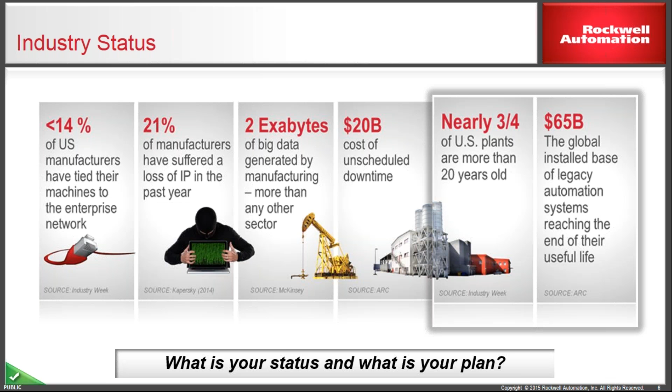But the last two are really highlighted there. I have a hard time believing that's even right - I would think it's more than three-fourths, but basically most of the industrial plants are older than 20 years old, and there's a $65 billion installed base of legacy equipment. And this doesn't just apply to Rockwell or Allen Bradley. It's going to be all the manufacturers out there.

So what are the - again, this is kind of fairly obvious, I would think, to anybody who's gotten older legacy stuff installed in their facility - but what are your risks, right? Your risks are just parts availability, and the fact that who knows how to program a PLC5 anymore, right?

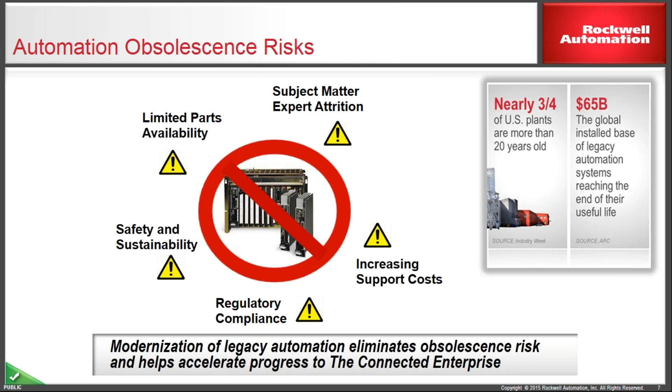So it's just harder and harder to manufacture the older equipment. Again, like I was saying, it's not just PLC5. PLC5 is top of mind today because we're at that end of life of it. But PLC5, of course, 1771 I/O, PanelView standards, a lot of drives, motors - this is just a Rockwell Allen Bradley centric slide. But then you look at the other manufacturers out there, and they're in the same boat as Rockwell, right? It's just harder and harder to maintain and manufacture the older industrial control equipment that's out there.

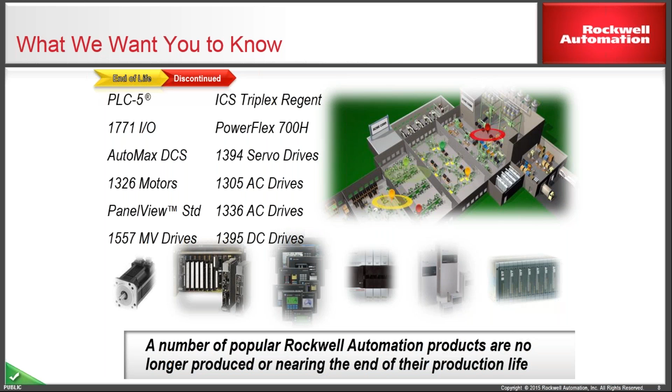So this chart is several years old, but just shows you that this is nothing new. Hopefully the fact that the PLC5 is end of life is not a surprise to anybody listening. This has been told now for several years, but it was a phased end-of-life approach, and certain catalog numbers were phased out earlier, around the 2012, 2013 timeframe, and then finally here to the end of June 2017.

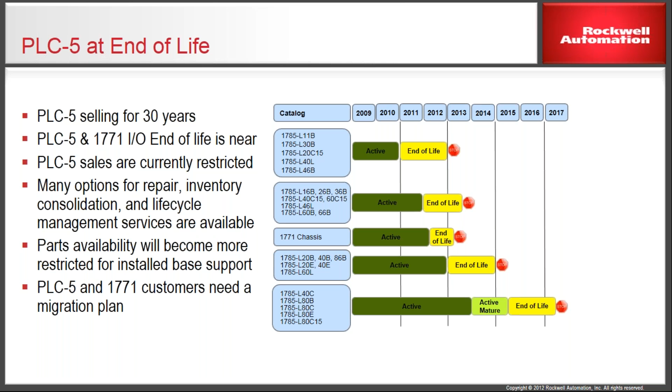And the real reason why this date is the RoHS compliance - so RoHS compliance, or the lead-free soldering manufacturing initiatives, I believe, are July 1st, 2017. So June 30th is that end-of-life date for PLC5. As a manufacturer, you have to weigh - we have a 30-year-old product, do we go back and re-engineer a 30-year-old product, or do we just say we have something newer and better out there, and let's put our R&D and investment in the newer platform? So it's a tough call, but that's kind of what led them to that decision.

So just to give a little background on the end of life of the PLC5, some highlights. It was first released in 1986, which is pretty amazing. The PLC itself has been around since 1968, 1969. So the PLC is turning close to 50 years old, and of those 50 years, the PLC5 has been around for 30. That's a pretty amazing stat.

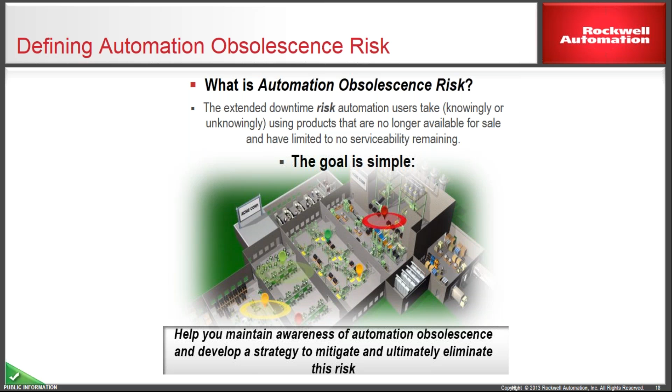One of the cool things Rockwell does is, to my knowledge, they're the only one in our industry that makes this public knowledge, the lifecycle status of their products. They divide it into four categories. Active is the brand new product in that category, you can think of it as the iPhone 7. Active mature is still a new product, still serviceable, still available, it's just that a newer family exists in that product category, think of it as the iPhone 6.

End of life is when Rockwell determines a specific date in the future where they're going to stop manufacturing these parts as new. And then discontinued is once it reaches that date, the product is discontinued. You can't buy it brand new, and the repair exchange services may still be available, but not all of them will be, not for all products.

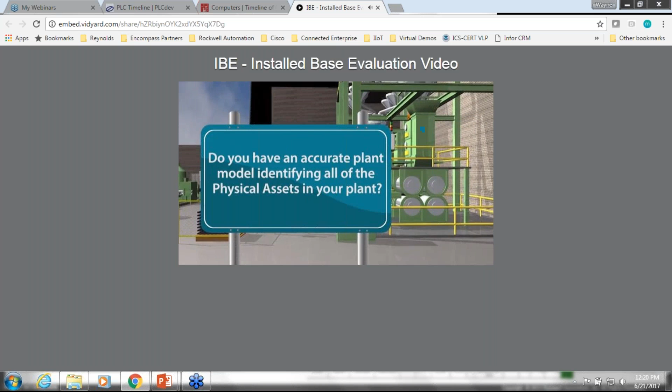Do you have an accurate plant model that identifies your physical assets? Do you know your obsolescence risk? What if a line goes down? Do you have the parts? Do you need to get it back online quickly?

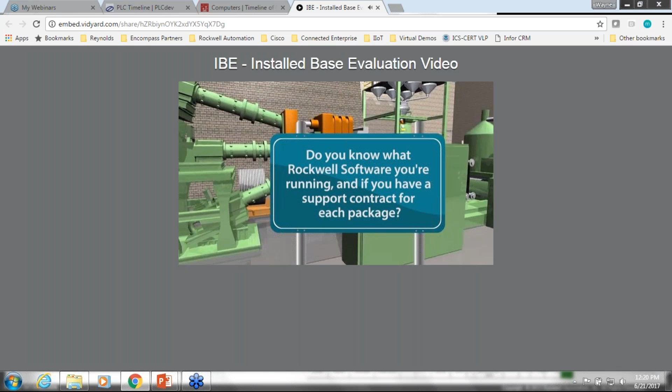Do you know what Rockwell software is running on your computers and whether you have support for these software packages? If you answered no to any of these questions, you need a Rockwell Automation Installed Base Evaluation.

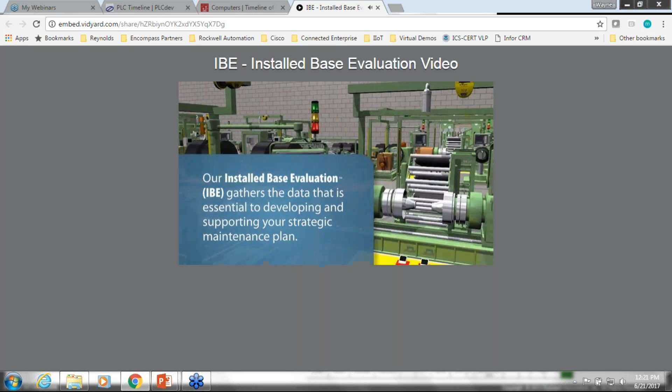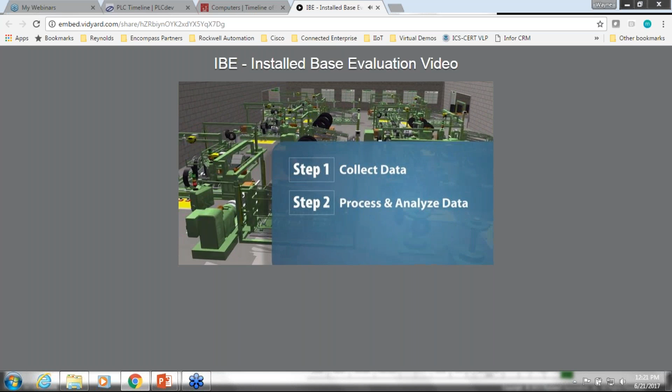An Installed Base Evaluation, or IBE, helps you develop and support an effective strategic maintenance plan by providing you with actionable intelligence. There are 3 steps to an IBE: collecting production-specific data on site, processing and analyzing that data, then delivering detailed reports and recommendations that can help you optimize your installed base and inventory levels.

Here's what an IBE might look like for a typical tire manufacturing plant. During data collection, a Rockwell Automation field service engineer uses a custom-built data collection application to gather detailed plant asset information. The engineer creates a hierarchy specific to that facility by mapping assets to production priorities and using terminology and plant descriptions that are important to you.

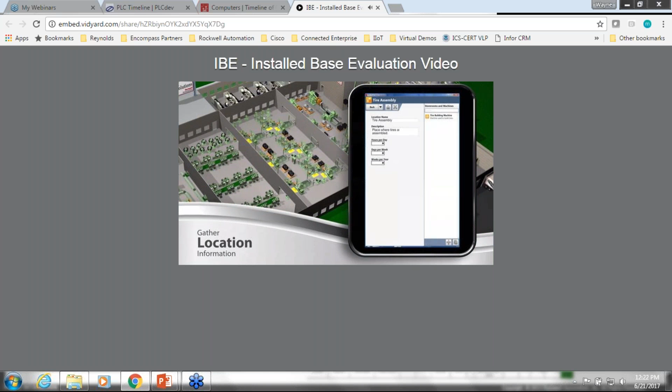Building by building, zone by zone, we go through every aspect of your production processes to capture relevant installed base and spare part data, including environmental conditions, the number of operating hours per process, and part catalog numbers.

Rockwell Automation has invested in the tools and software needed to collect and analyze this kind of data efficiently. We use these tools to collect data on every asset so you and your staff can focus on running your plant. Our IBE analysts compare the collected data to our master database, which contains information and attributes for more than 3 million Rockwell Automation and third-party products.

Using specially designed algorithms, mean time between failure rates, and variable operating hours by production process, we calculate recommended inventory investment levels and generate a series of reports that can be sorted according to highest risk. Finally, a Rockwell Automation IBE specialist will meet with you to present our recommendations and share the interactive reporting tools.

Let's look at 3 examples. The inventory analysis report gives an overview of what's installed and what's in the storeroom. This customer's total inventory has been valued at just over $435,000. 71% of that is their installed base, and 29% is in their storeroom.

A closer look at the storeroom inventory tells us that they have 32% classified as active spares, which directly support the installed base; 40% classified as excessive active spares, which is more than what they need based on our findings; and 28% classified as inactive spares, which were found in the storeroom but not in the installed base.

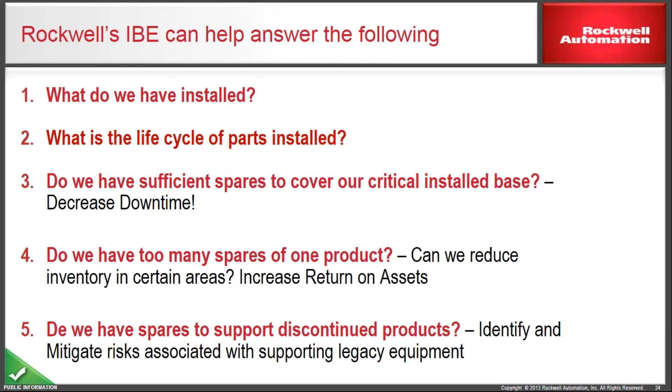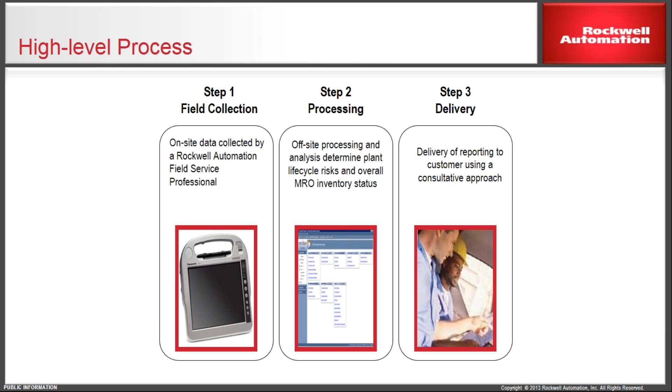So this, real quick, is field collecting, processing, and delivery. The deliverable is all the Excel sheets where you can search and find all the data we've collected, and then we'll give you an executive summary. We'll come and do a presentation for you, your management team, whoever.

The first thing we're going to do, even before we go on site, is develop a hierarchy, all the way down to the panel level and then the product within the panel level. That way, when you're searching through all that data in Excel and picking and choosing where you want to see where your risk is at, we know exactly what part, what location, exactly where it's at in your plant.

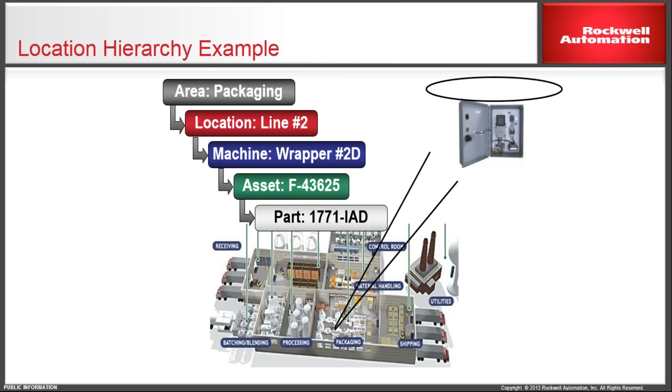So now we're going to look at a couple slides from an example executive summary, and we'll go through that just so you get an idea of what you'll be presented with, what you can use.

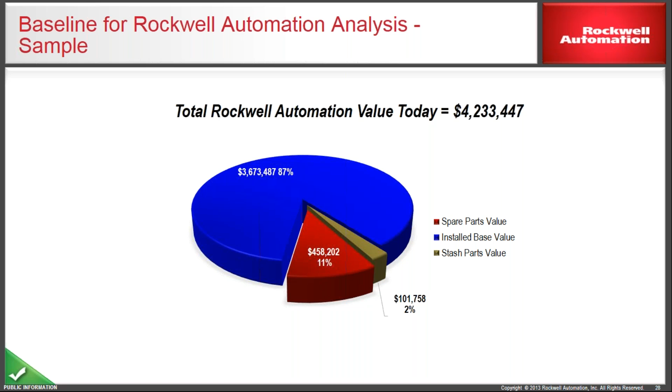So the first thing, we're also going to give you the Rockwell Automation value of your assets today. That's going to be the value you have in your active installed base, your spare parts value, and your stash parts.

Then we're going to go through your status of spares, and we'll give you not only a monetary value for it, but we'll let you know if it's active. Active is what we found in the field. Now this is just the spares in your inventory. We also found in your inventory, and according to Rockwell's mean time between failure data, we feel that you have the right amount of spares to cover what you have in the field.

Excess active is, obviously, we found in the field and in the storeroom, but according to Rockwell's mean time between failure data, you have too many spares in that category, that product. And then inactive is product we found in your storeroom, but we didn't find it anywhere in your facility.

That might mean we missed a panel - there's big facilities with panels hidden in all kinds of places - or it could mean it's just old projects, old parts that you've never got around to get rid of. And then we'll give you an estimated excess carrying cost - what is that costing you to hold all that material that you don't need in your inventory?

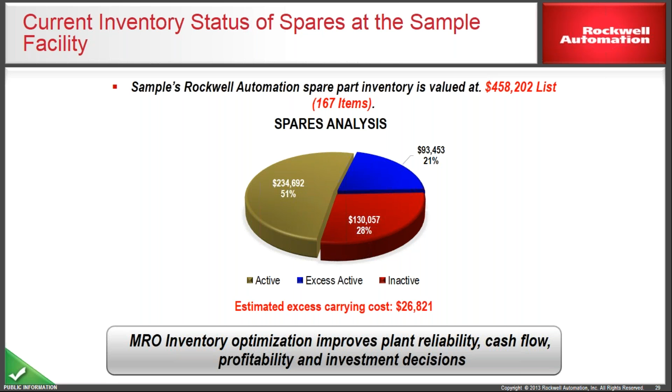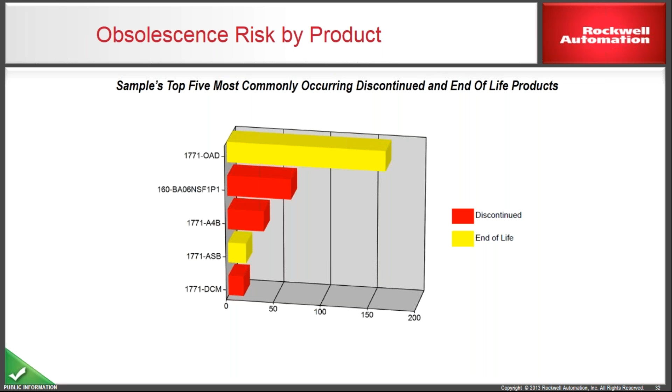And then, real quick, since we're already going through your panel, we're going to give you an overall condition of your panel - the environment, ventilation, ground, and wiring. Is it rusted out? Is there water getting into it? Some food and beverage may have syrup, whatever it is. Is there a rat's nest? The engineers doing the assessment have their criteria: good, fair, or poor. So we'll give you that info.

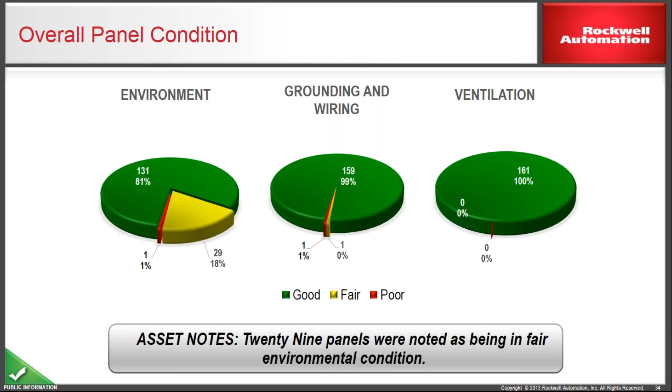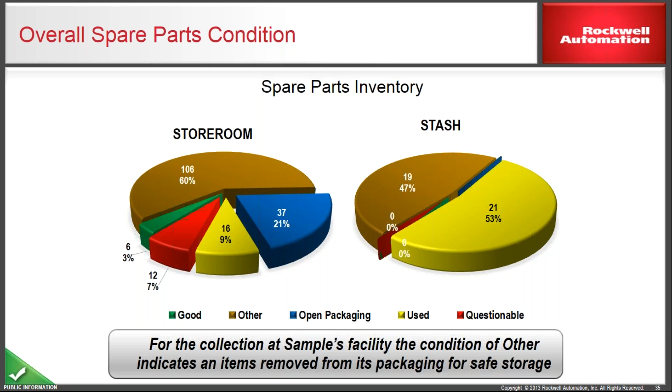Another thing we'll give you is a spare parts inventory. So what is the condition of your spare parts? Are they sealed in a box where you know they're good, or are they in a box but the seal's been broken? Do they look used or questionable in any sort? We'll give you that data as well, and I'll cover a service we can provide to help you out with your suspect inventory.

Okay, now we're going to jump. Any questions on that before we move on? So, remanufacturing and repair.

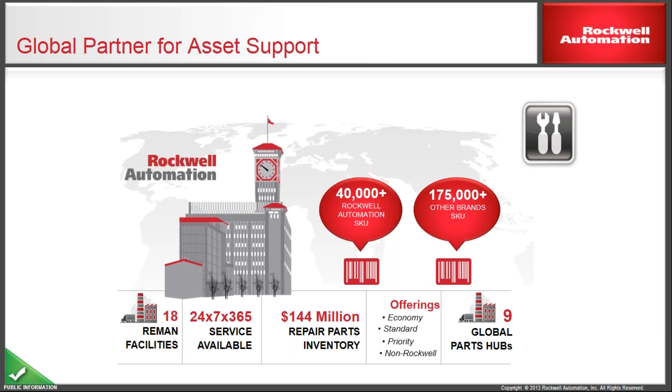Rockwell can remanufacture Rockwell assets as well as repair third-party stuff. They've got 144 million in repair parts inventory, 9 global hubs. We've got 3 standard offerings, which we'll get into in a second. They're all ISO certified facilities, with a big group of people behind this remanufacturing and repair.

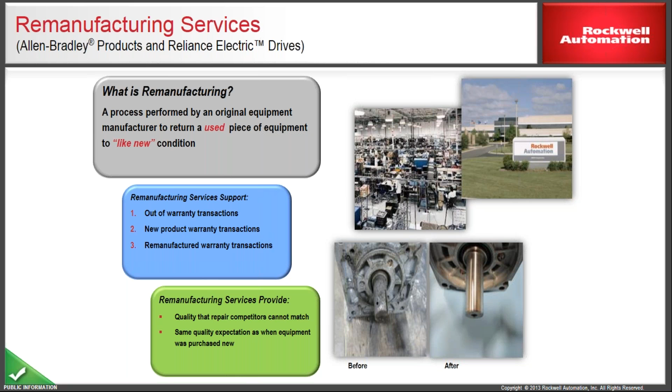So what is remanufacturing? This is the OEM. Rockwell is going to return a used piece of equipment into a like-new condition. What we do at the reman facilities is out of warranty transactions, which are all the billable stuff. The new product warranty transactions we'll fix there, and then you get a warranty with anything we remanufacture, we'll take care of that there. A lot of the stuff we do, especially to the Rockwell parts, we're the only ones who can do it.

And what does like-new mean to Rockwell? We're going to restore it to a functional state. We expect that part to function and work just like it did brand new. Firmware revisions - that's something Rockwell can only do; every time you send something in for remanufacture, we're going to check it, see if the firmware needs the latest revisions. Engineering updates, verification of all OEM specified components - that's all Rockwell stuff.

Functional testing completed. We're going to make sure that everything we send back to you has been functionally tested to make sure that we know it works before you get it back.

And then the other thing is serial number. The first thing we do when we get that part in the repair hub is log the serial number so we can keep track of the warranty, whether it's a new product or remanufactured warranty, whether you got an extended warranty, whatever you did, we'll keep track of that for you. And then it's a comprehensive warranty - so if you send in a drive and only needed one little component repaired, when we send that drive back to you, the entire drive is going to be covered under the warranty, not just that component we fixed.

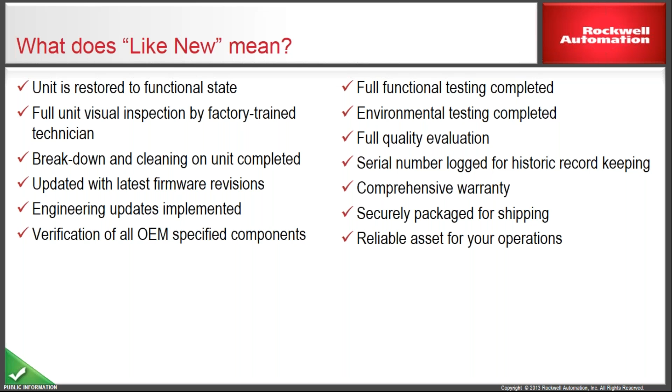So for the sake of time, I had another video I was going to show, but basically it's a proprietary remanufacturing process - all the firmware enhancements, the engineering updates. It'll show we're going to receive it, that's when we do the login of the serial numbers. We're going to do all their enhancements and revisions - that'll be the engineering update, component verification, replacement. We're going to do the functional testing, make sure that product actually works before it ships out. Environmental testing, final quality, and then we'll secure ship it.

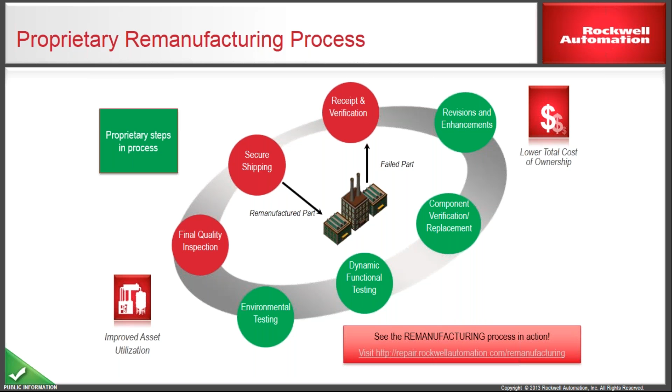I guess we're not going to show the video just for sake of time. We'll put it online after, and all this is on Rockwell's website - everything I'm showing y'all today.

So the 3 service levels are going to be economy, standard, and priority. All three levels go through the same exact process - the only difference is going to be the delivery date and the warranty. Economy is the cheapest, a 4-week turnaround, you get a 12-month warranty. Standard is roughly a 2-week turnaround, and you get an 18-month warranty. Priority is your priority exchange - we're going to ship it to you next day air, and you get a 2-year warranty on that.

On the priority exchange, once you get the new product, we're going to ship it to you with a shipping label to send your old product back to us so we can remanufacture that and put it back in our hub. So that part of the process has to take place as well. Some of these warranties are better than the new product warranty right there, so that's some value added.

Once a product becomes obsolete and isn't readily available to repair, we need to look at reserved repair. Rockwell gives you access to the repair, you give us a list of your obsolete parts that are critical, and we go out and secure the components needed to have the in-house capability to repair those parts for you. The actual repair is a separate transaction, but we're securing access to those legacy items that are hard to repair and hard to find parts for. This service can keep you running if you need to keep older equipment running for another couple of years or whatever your strategy is.

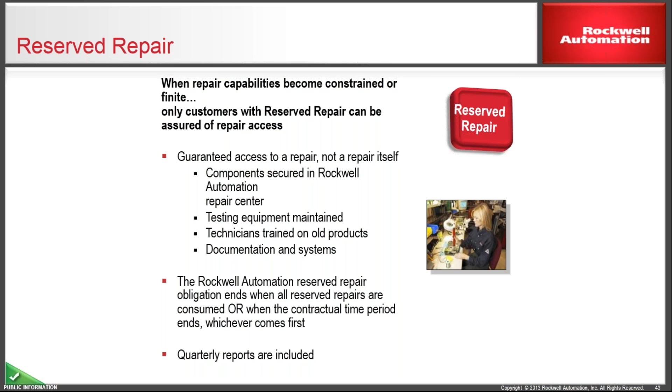Here's another service we can help you with: inventory assurance. It's for all your suspect inventory that's been laying around, where you don't know where it came from, packages are open, it looks used. You can send 5 units to us, not necessarily the same unit, and we'll run it through a recertification process, basically the end process of our reman facility. If it passes all the tests, we'll put it back in a box, seal it, and give it back to you with a 1-year warranty. If it fails testing, we'll put it through the remanufacturing process, billable at the remanufactured price. This is a cost-effective way of recertifying your suspect inventory so you know what you have is good.

Any questions on anything I've covered so far? Good.

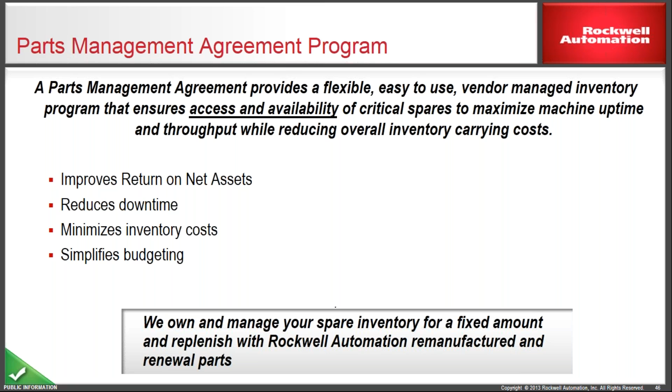Now we're going to get into the PMA, Parts Management Agreement. This is Rockwell-owned inventory on site—flexible, easy to use inventory that we manage, giving you access to your critical spares while reducing your carrying costs. This service will reduce your inventory costs. We own and manage your spare inventory for a fixed amount, replenished with Rockwell automation remanufactured and renewal parts. This is for your critical spares, and we'll do an in-service warranty, which I'll get into on the next slide. You can also do an extended warranty option, and some customers choose to go ahead with that as well.

Let's say, for easy math, we have one part with a $100 list price—Rockwell's online price. But we know you actually don't pay $100, you probably pay close to $75. Carrying costs today, for lean operations, are around 10%, and can go all the way up to 28% or higher. If you Google it, the national average is around 20% for actual carrying cost, but for our discussion we'll keep it easy at 10%, assuming you're lean. Carrying cost is defined as all your taxes, insurance, storage—whatever cost you incur to keep your inventory. That's carrying cost, 10% each year.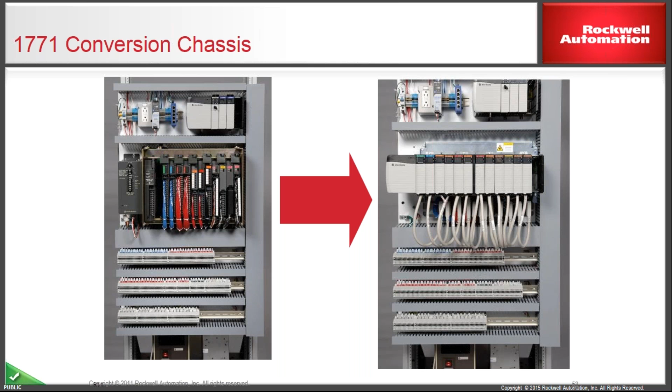And really it's designed for an I/O rack conversion. So if you had a CPU rack that's just bringing in remote I/O data, with no local I/O in that chassis, then the conversion chassis doesn't really buy you a whole lot of value. But if you have an I/O rack with lots of I/O wiring in place, that's where the conversion chassis really comes in handy.

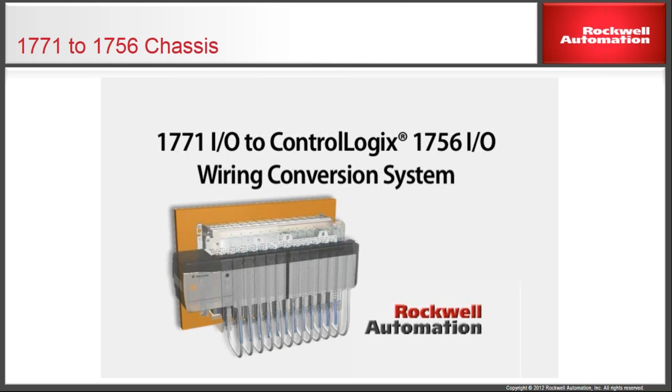So this is a very quick little video. The conversion modules - it shows it much better than I can explain it - allow for the 1771 I/O field wiring to connect to the 1756 I/O. It creates an easier method.

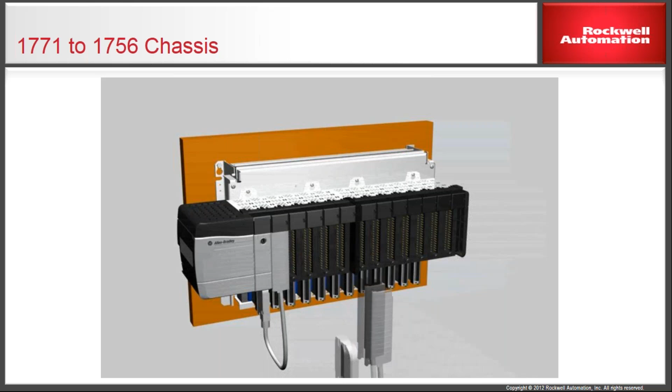So that was, like I said, the video does a nice job of showing it. So big advantage there is time savings, right? So we find ourselves in that situation with a lot of customers when we talk about the conversion chassis.

They might have a very limited downtime situation. Conversion chassis definitely helps. There are times when a customer is like, you know what, if we're going to go through the process of ripping out all that, we want to clean up the wiring. So a lot of times with the conversion chassis, they may not want to go that route.

So do you have one-for-one for each of the cards, or do you sometimes have to wire directly? No, it's one for one. There are situations where one card might turn into two ControlLogix cards, and sometimes two 1771 cards might turn into one ControlLogix card. So there are situations like that.

So the other point here too is, again, we're talking about downtime situations and how much do you really want to disrupt operations, and that's when we get into phased migration. There's really a lot of ways to do this, and what we show on the slides here is just one way, and everybody's got different circumstances, but there's a lot of flexibility in migrating to the new stuff, and it all really boils down to getting onto the Ethernet IP backbone for all your I/O.

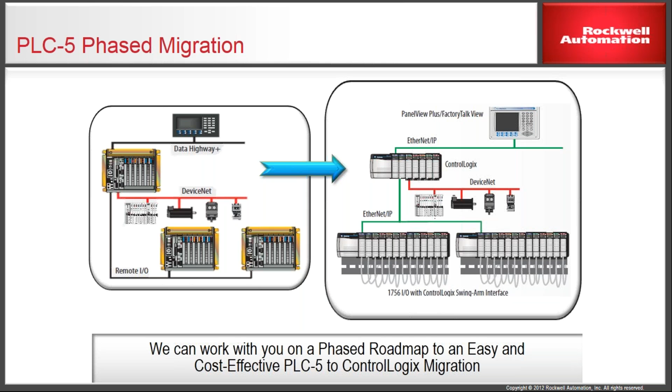But with the ControlLogix family, you can still bridge to your older legacy networks. You can replace a controller first, keep the bridge to your legacy networks, and then over time switch your I/O racks over to Ethernet IP, perhaps in little windows of opportunity versus one long outage.

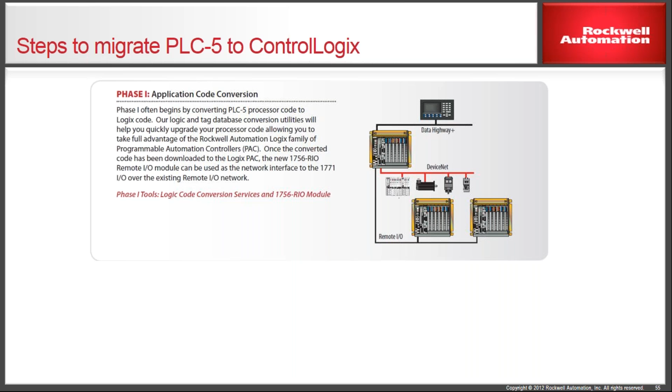So this slide just kind of builds that up a little bit, right? So phase one, of course, is the code conversion. This slide talks about conversion services, but there is a software conversion tool available from Rockwell's website. You can download it, and then you can take your code and convert it. There are steps to that, of course, but you can convert your code.

Like we said a minute ago, the next step would be to replace the PLC 5 controller. So in this case, we took the controller out, put the ControlLogix in its place. We still remained on our legacy network. Again, there's a lot of advantage to that, right? Because we know when you get to the I/O side of things, that's when the can of worms gets opened. So if you want to keep that network in place - and we know it's easy for us to say go to Ethernet, but you just can't go pull Cat5 cable easily throughout the facility. So there's a lot of reasons why staying on the legacy network might make sense for a short-term period.

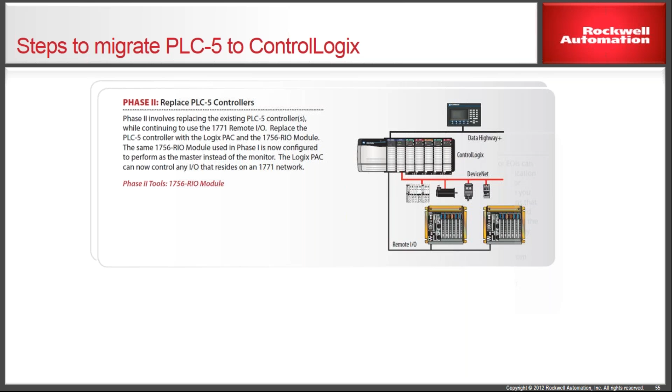Next step may be on the HMI side, right? So it's probably a lot easier to convert your HMI side to Ethernet, and again, leaving your I/O perhaps on that legacy network.

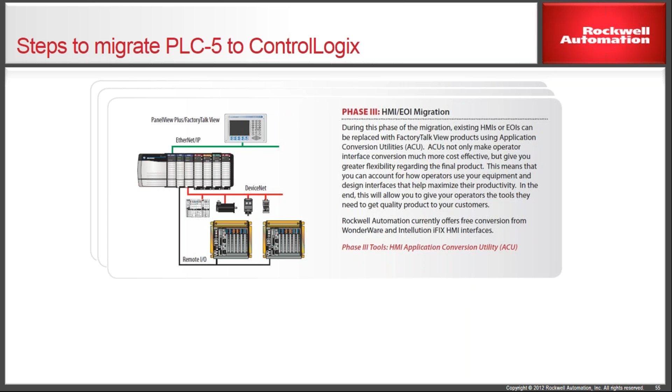There's a migration document. It'll be made available on our website as part of the follow-up to this session, showing these pictures as well.

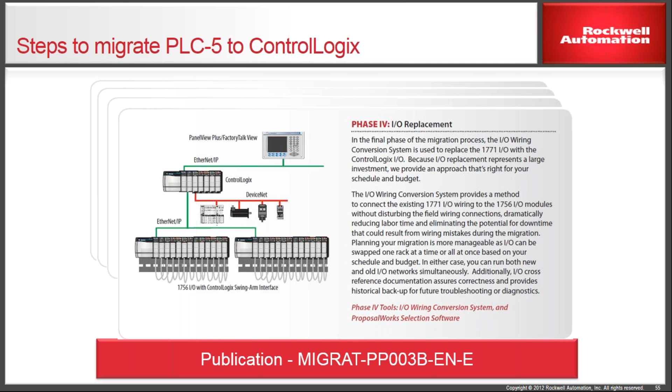So we talked about the PLC 5, but we can also talk about the SLC 500. The SLC 500 is active mature, so it's not in any end-of-life status yet. But we know there's newer technology out there, CompactLogix, ControlLogix. So going to a SLC in a greenfield situation doesn't really make a lot of sense. And if you've got an SLC customer out there, you can do a very similar approach.

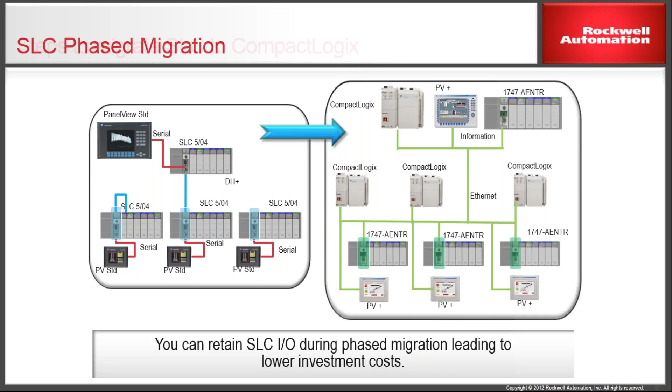Here's the before and after, Data Highway Plus, but now they're moving to CompactLogix. The nice thing about the SLC is that you can take the CPU out and put the 1747 AENTR module in its place. So now that SLC rack is an Ethernet remote I/O drop. Again, the SLC I/O is not going end of life, so you can maintain the I/O part of it, but get the advantages of the Logix family.

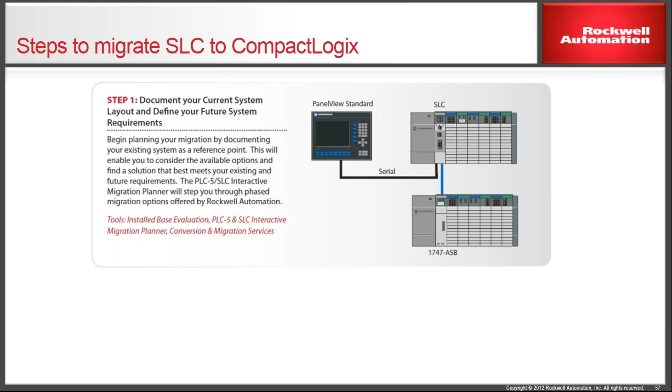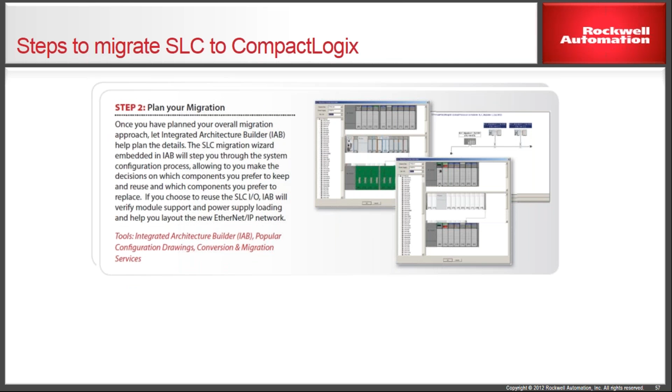In a similar build-up, step one is documenting, so that's part of the Installed Base Evaluation, just to know what's out there. Plan your migration. I'm going to show you that tool in a second. Integrated Architecture Builder has a great little wizard to help you with these migrations.

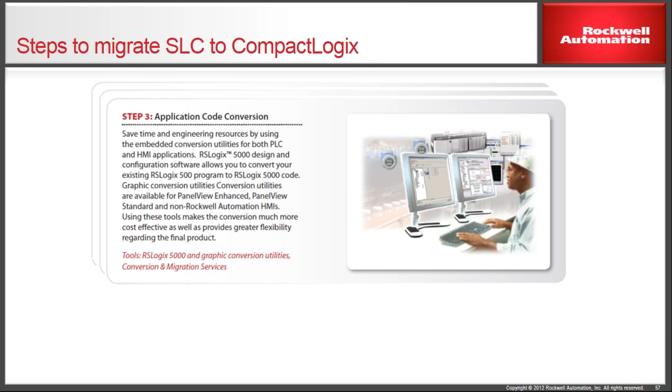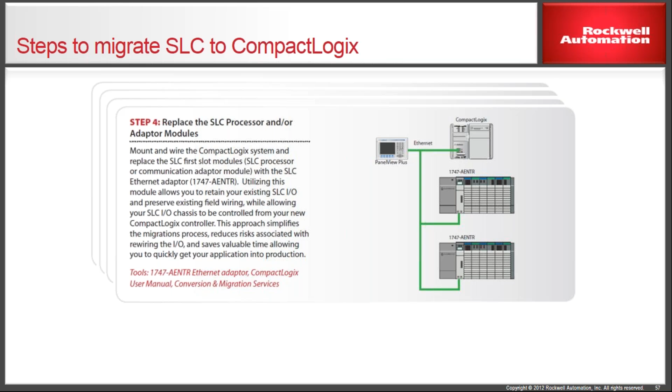Code conversion, once again, there's a software utility that Rockwell provides that can help you convert that code. And then begin to replace, you can basically put a CompactLogix as your controller, just a CPU by itself, really could just sit there, and then again go to Ethernet and use your SLC racks now as an Ethernet drop. So again, quick and easy migration. And then they're building into operator interfaces as well onto the Ethernet platform.

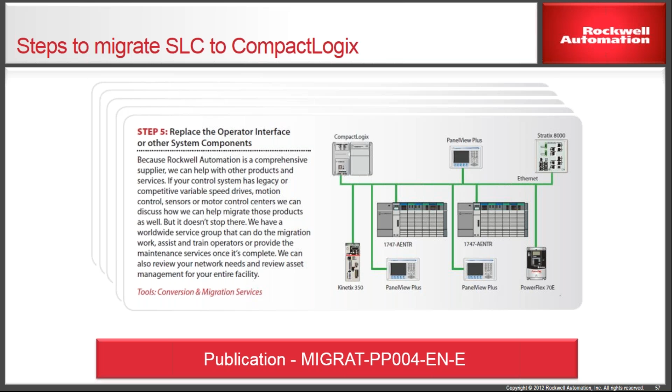And there's a separate SLC migration publication that we'll post as well.